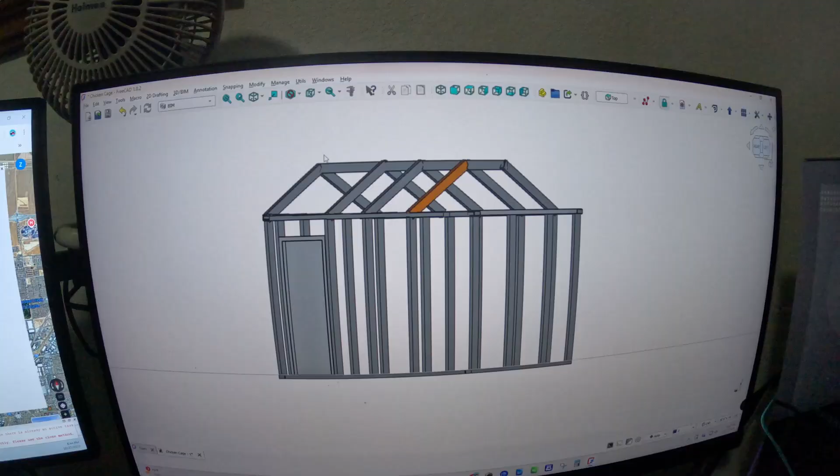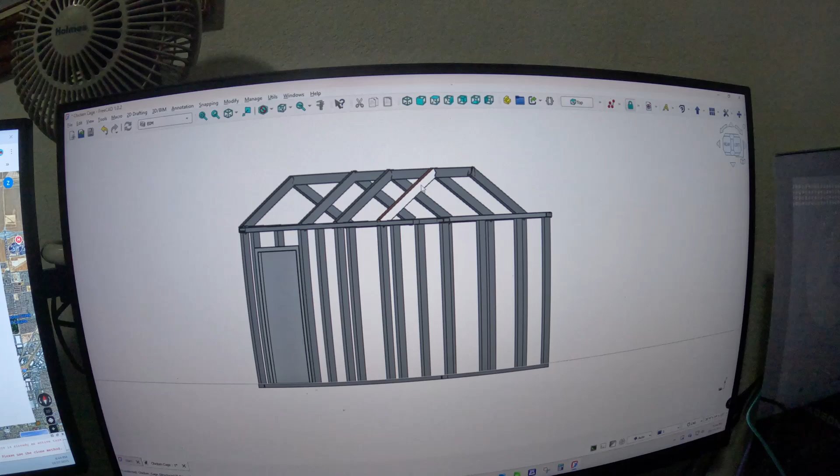Today I'm using this FreeCAD drawing to show you how to make a copy of the parts that are already created here to complete the structure. This structure here I'm making is the small storage unit. In order to do that, first I click on the part of the structure that I need to copy by clicking the part, and it should turn blue or gray.

So let's try this one. I'll choose this one instead. So it turned gray. The reason why this is an odd color is I was just making an experiment on how to change the color of a part, but normally the color is like this, gray. So I already highlighted that in blue. I already selected that part.

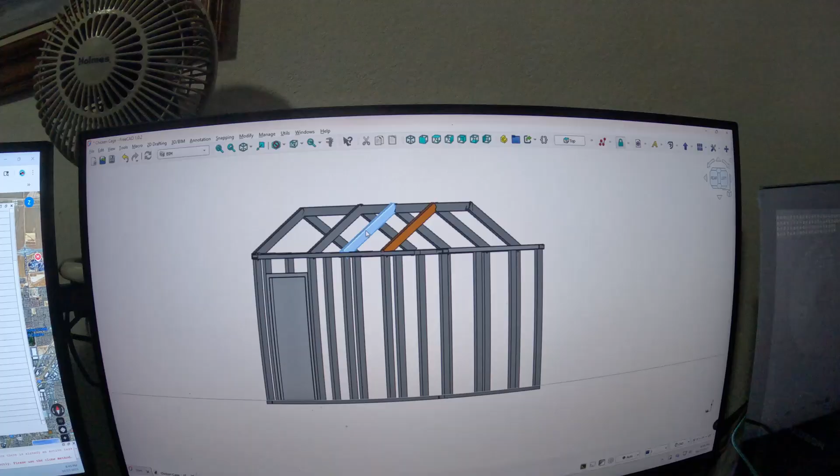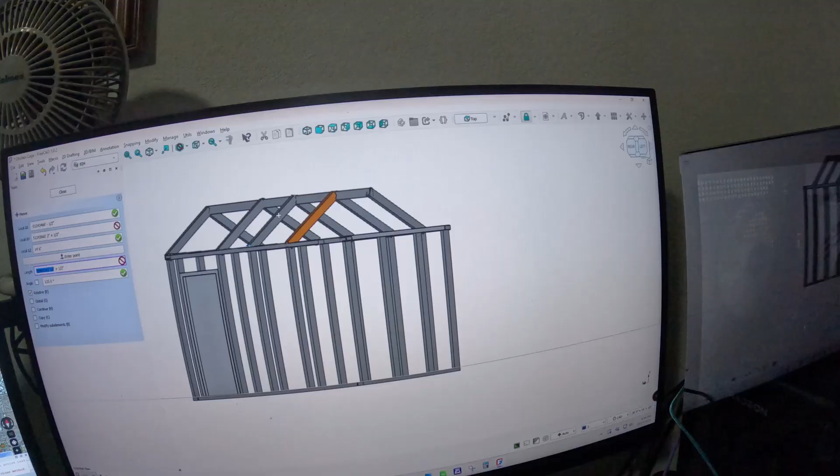So what I'm gonna do next is go over here on the corner, but first of all, make sure you are on the beam right here, because there are other parts over here in the section you can choose. So I choose beam, and this menu here shows up. Next thing you do is click those arrows and then click on the sheep, which means you're gonna clone it. So click on that and then go back to the part that you highlighted earlier, click on that and then drag the piece to where you want it.

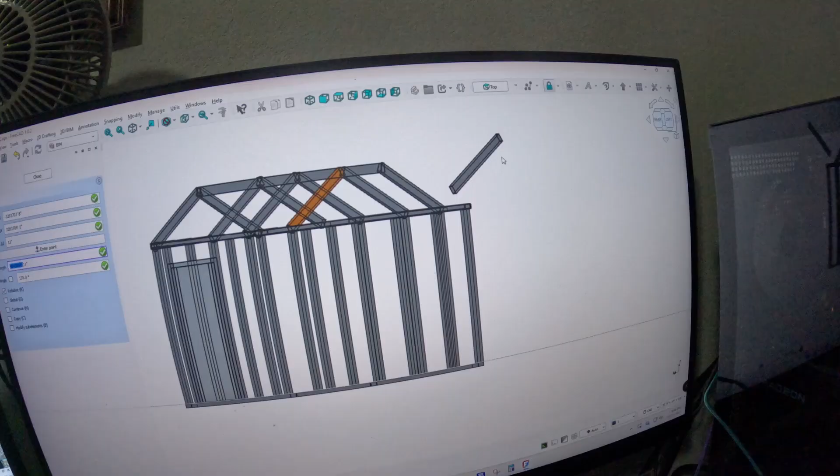And right now, when you're having a hard time dragging it like this, you just need to drag it somewhere like in here, and then you can just move it later on to where you want it. So right there, I left it there. And now I'm gonna use these buttons here to turn this image, and there's my part, and I'm gonna put that part in this area right here. So right here, because it's missing.

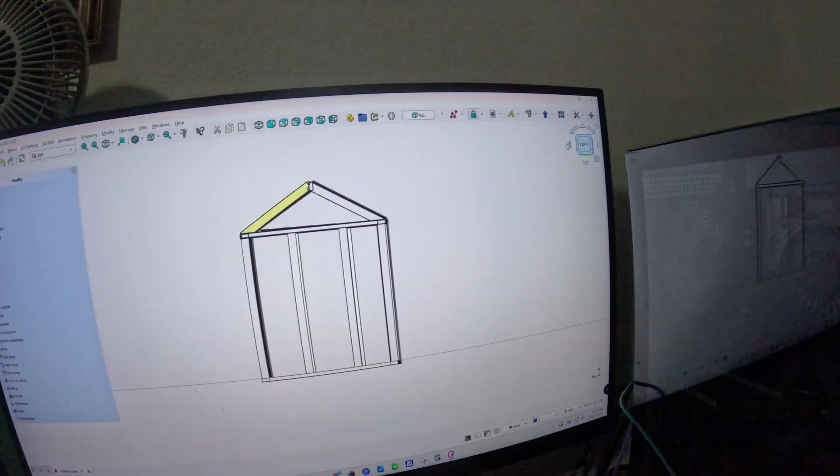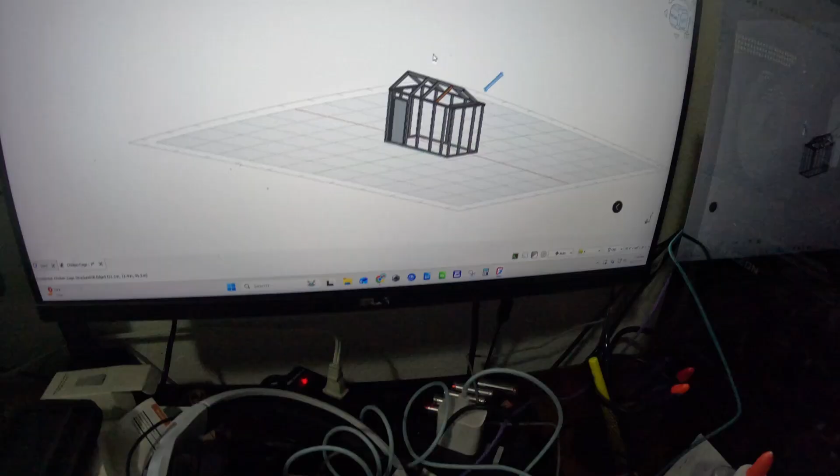Next thing you do is click on the beam again right here, go back here, and these graphics will show. I love using this one, because it's like drawing it on paper, but it's in 3D. This piece over here, I'm now ready to put it in place in here.

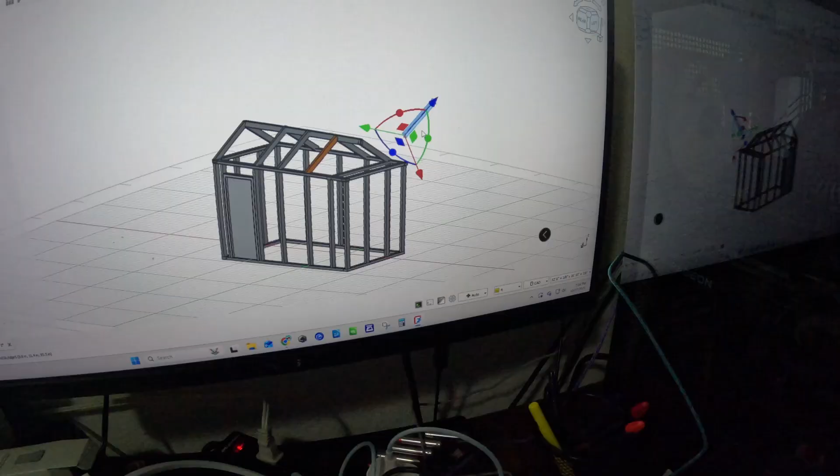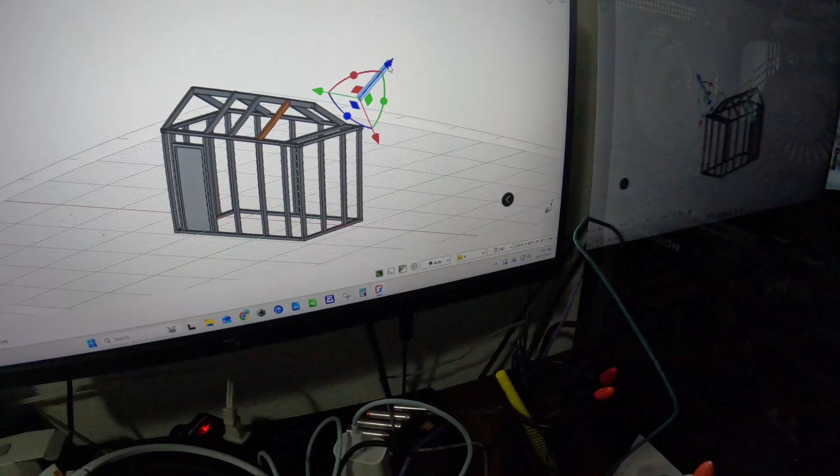So what I'm gonna do with that is click on edit right here, and then transform, and then these 3 axes over here will show up, and these axes can be used in 3 different directions, and you can twist it with all these 3 circles over there. You can twist it in different directions. So now I'm gonna have to move it down and then align it with this right here, and then move this one over,

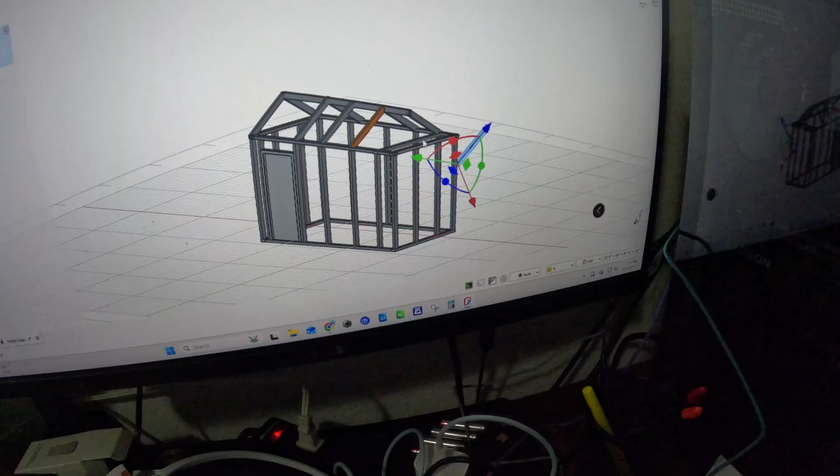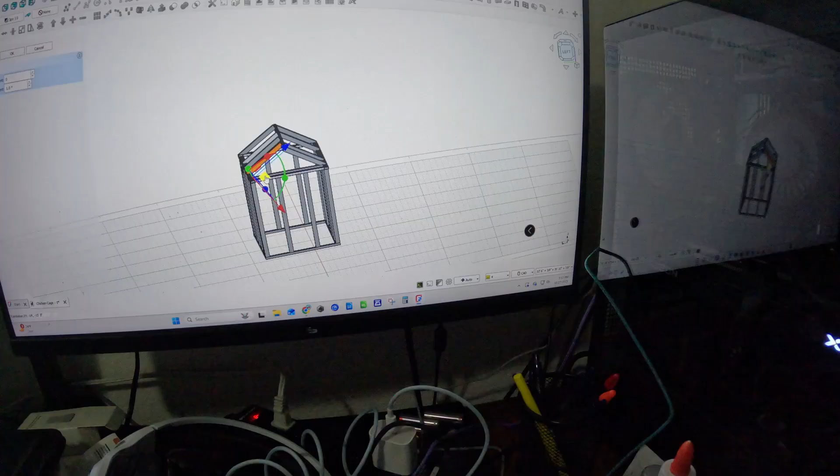and as you notice, the piece that I need to put in the front is behind. So in that case, I have to turn this cage around so that I can see where that piece is at. Here I just realized the piece is all the way out here. So now I can just move it over by bringing it up closer here, and then now I turn this item again until I get it to the right place.

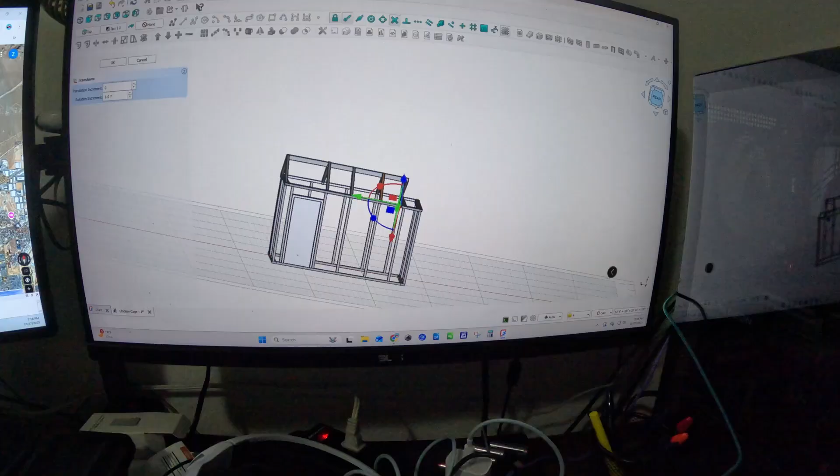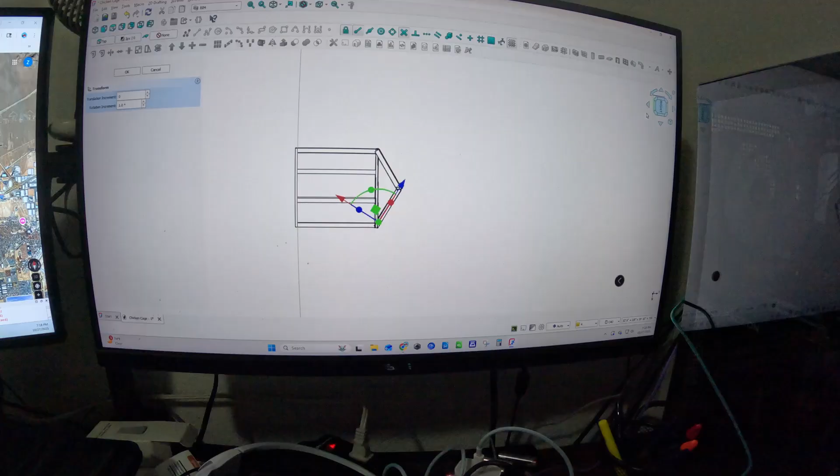This is the rookie way of doing it. I'm pretty sure there are more people who know how to do this easier and faster than me. And so just drag it and move it in its place, and I do this several times until I line it up with the rest. So in this case here, that's lined up now, and then I'm gonna have to turn it again to look at a different angle.

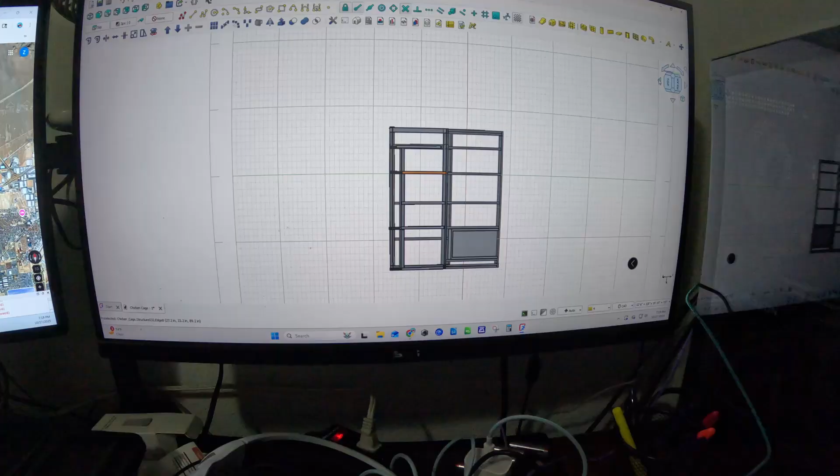That's lined up, and then that's lined up, and then I'm gonna check the top view on how it looks. That's bottom, rear, and top view, and there you go. So I was able to attach that and line it up correctly.

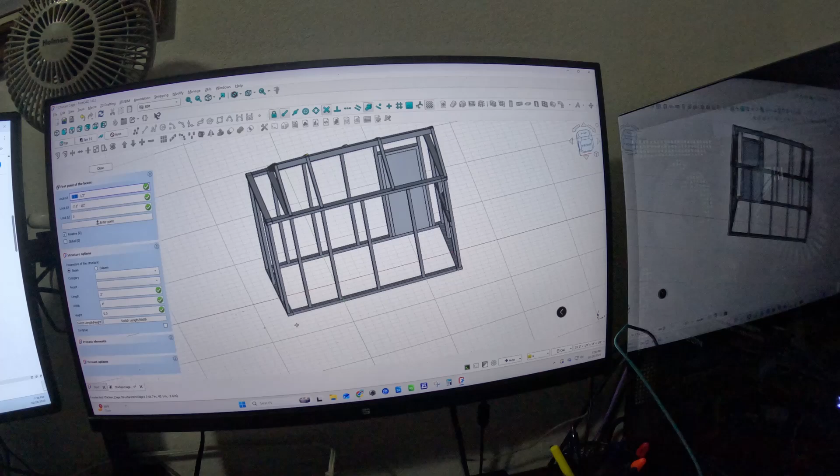When you try to add a cross beam over here, simply click on this one right here, the beam, and then create it over here. This is what I do, create it over here at the bottom for now, and then it disappears. But don't worry about it, just go on here, because whatever you created should be here in the tree view. This here's beam 19.

Right now it has a length of 10 feet 7 inches, and it has a width of 4 inches, and, let's see here, there's no height, so we have to put the height on this. So I'm going to put 2 inches, and now, since I put the height of 2 inches, basically from here to here is 2 inches, and then from here to there is 4 inches.

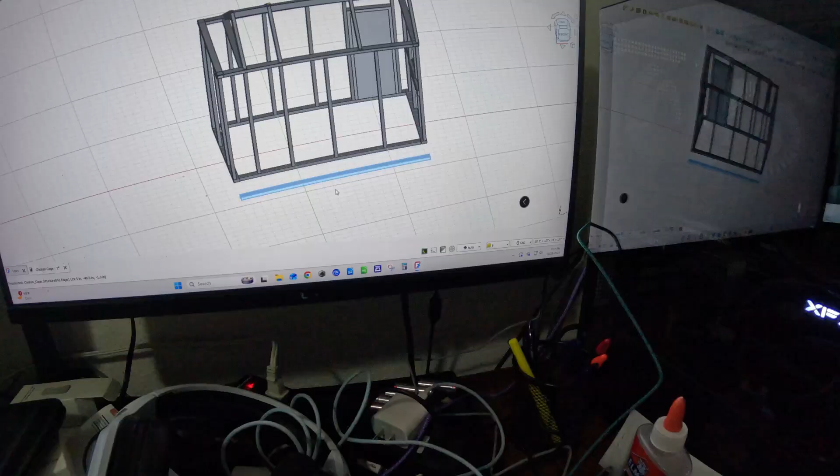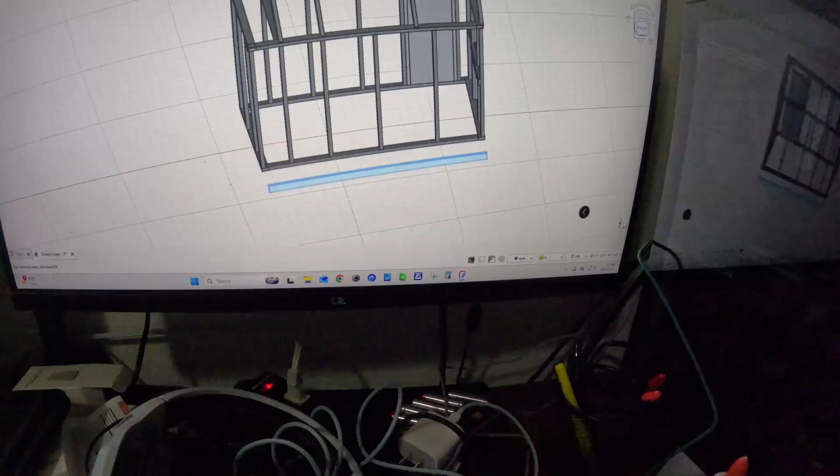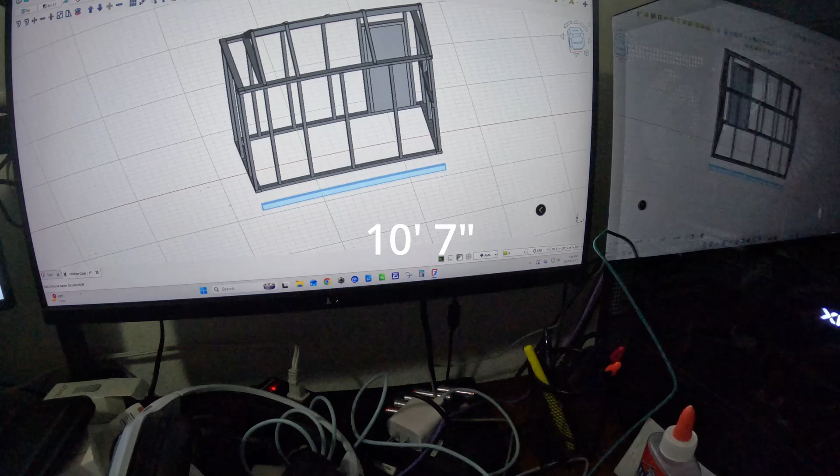So it's 2x4 wood, but the orientation of the wood or the beam is the wrong way. So I want to turn this over one time. I do that by changing the measurement here. Instead of 2 inches, I'm gonna put 4 inches here, and then 2 inches right here. Okay, and now that changes to 4 inches high right there, 4 inches high, and then 2 inches wide, and let's see, it's about 10 feet something long, 10 feet and 7 inches long.

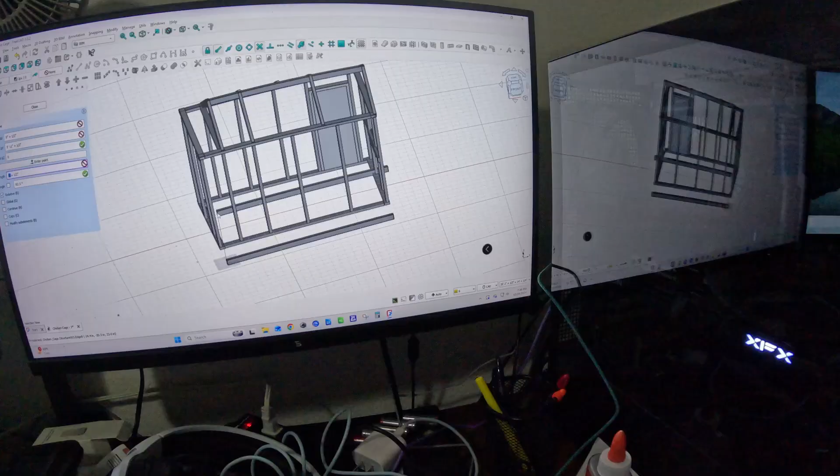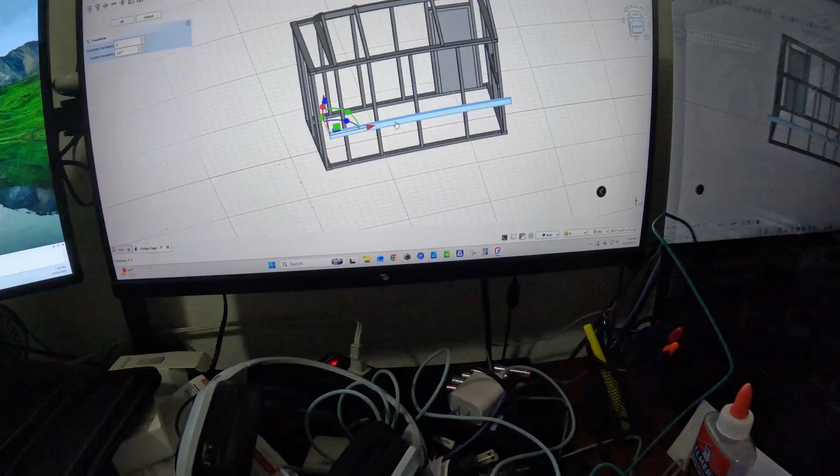Now in order for me to place that over here where I want it, I just click on this here, and then move this one to where I want it. You can use the move, or you can also use the transform, which is over here on edit. Click on edit, transform, and then you have these 3 arrows going this way, and then up, and then that way, left or right. See, so I'm gonna put it along the frame right here.

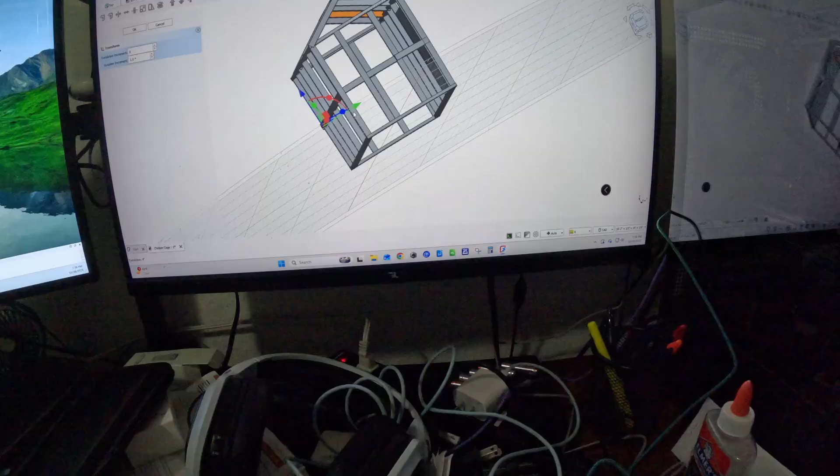So I'm gonna turn this to line it up, and I have a cross beam already here, so I'm gonna just align that one there, and then bring it closer like that, and then I'm gonna turn this several times to make sure the piece that I put in is lined up with the rest of the frame. And I just needed some fine tuning, and yeah, that's basically it on how to frame.